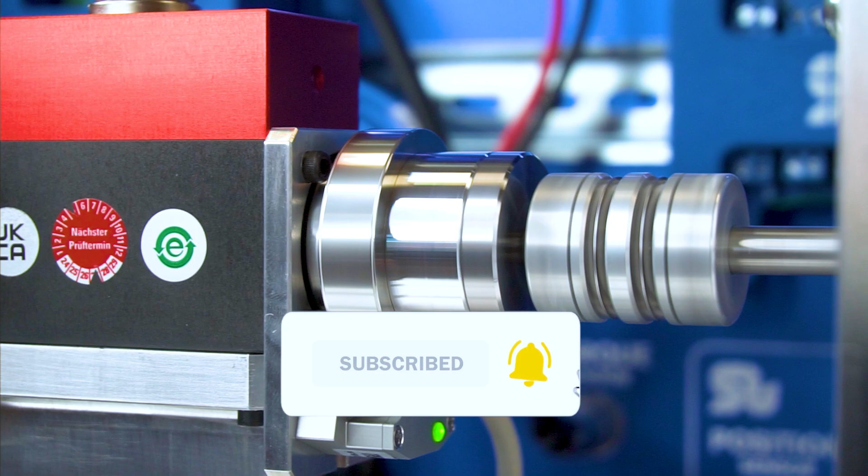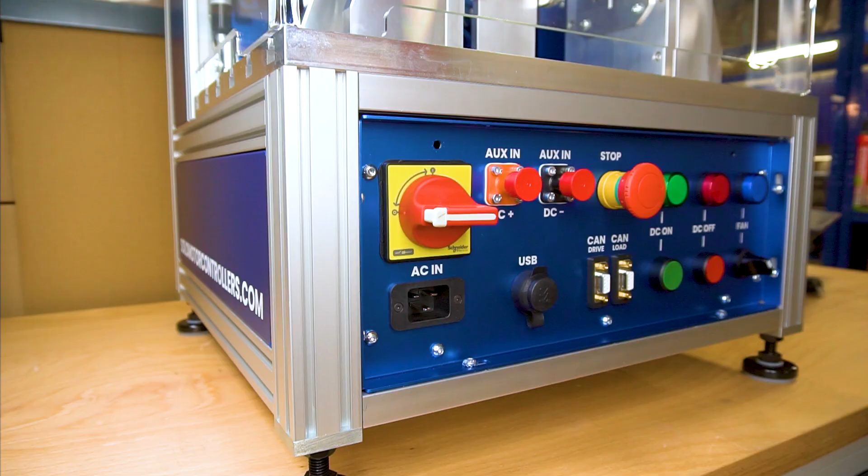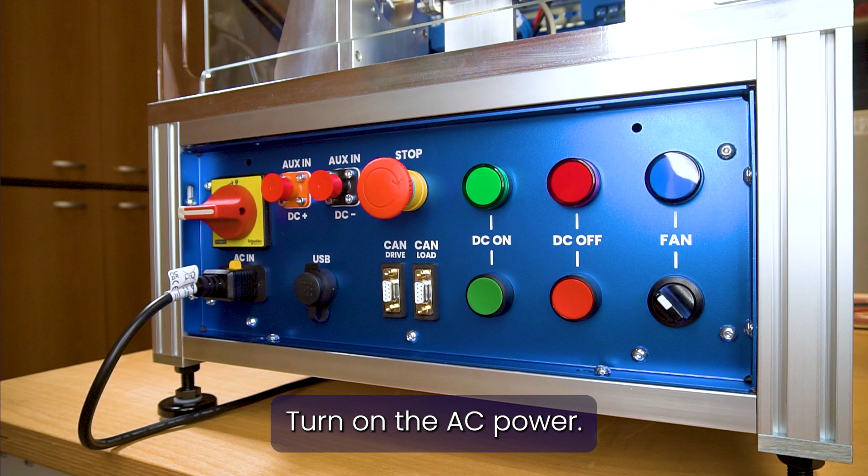In this video, you will learn how to operate the motor test bench and measure critical parameters such as speed, current, and torque. Plug in the AC power cord. Turn on the AC power. Open the protective cover.

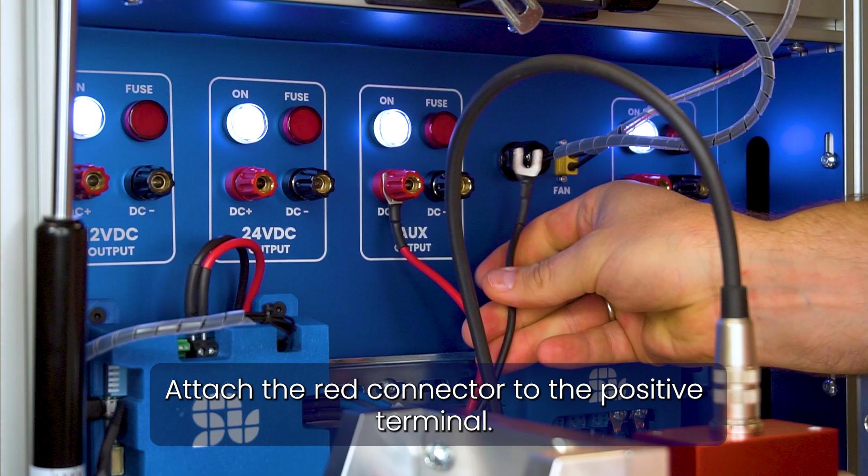Connect the DC power cables, ensuring the polarity is correct. Attach the red connector to the positive terminal. Attach the black connector to the negative terminal. To connect the external power supply, use the auxiliary inputs.

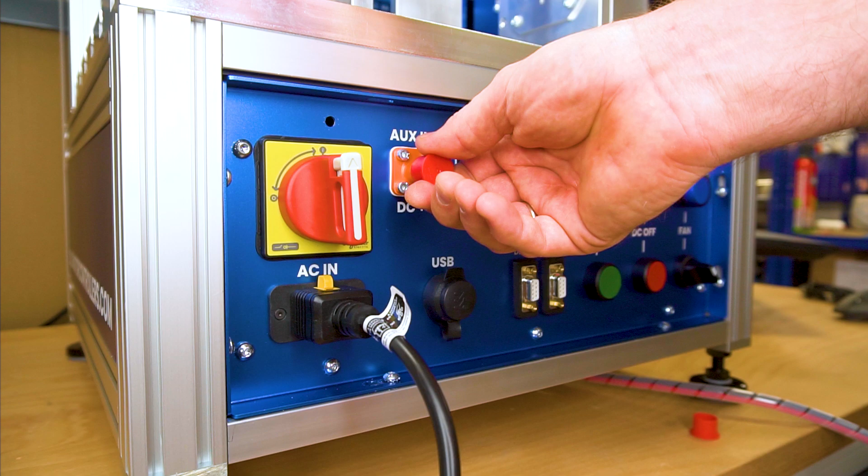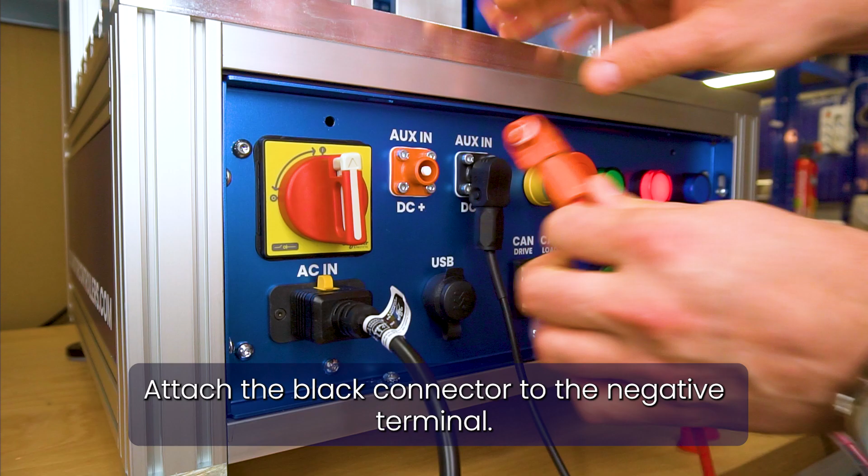Connect the DC power cables, ensuring the polarity is correct. Attach the black connector to the negative terminal. Attach the red connector to the positive voltage terminal. Ensure the shafts spin freely.

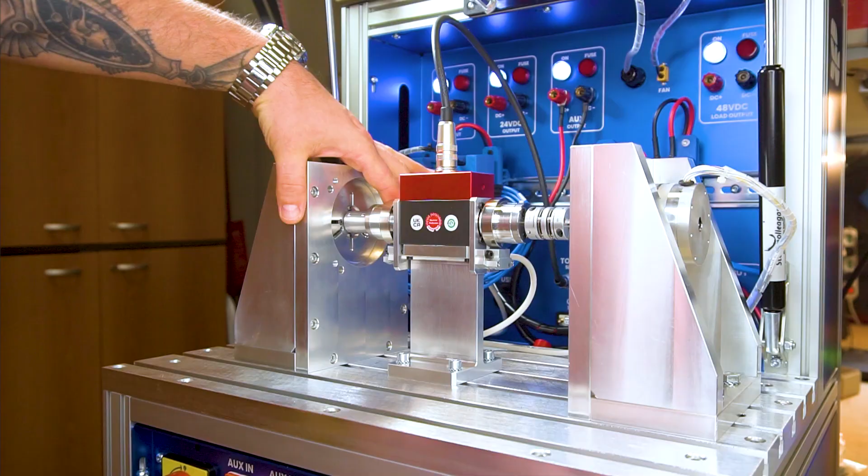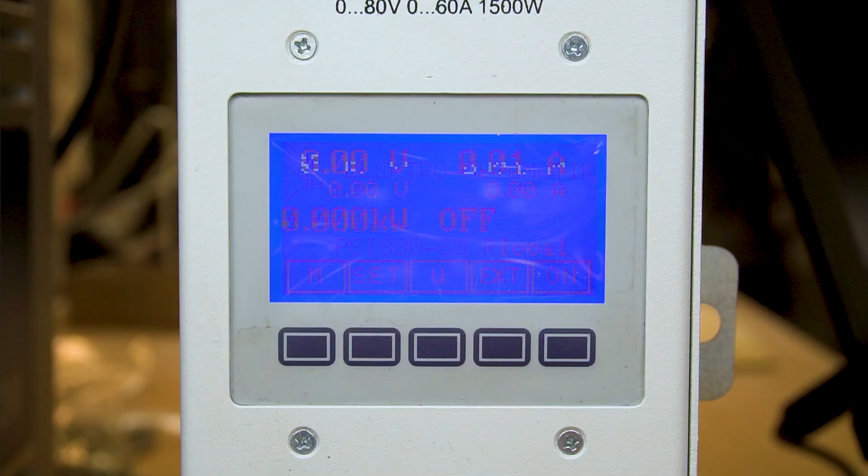Check that no foreign objects are inside the chamber. Close the covers securely before proceeding. Turn on the power supply. Verify that the bus voltage and current limit are correctly set according to the specifications of the motor being used.

Now, connect the USB cable to the data panel. Connect the USB cable to the PC. Turn on the main DC power. One of the key features of this test bench is Safe Torque Off. This safety feature stops the motors if the protective cover is opened or the red stop button is pressed.

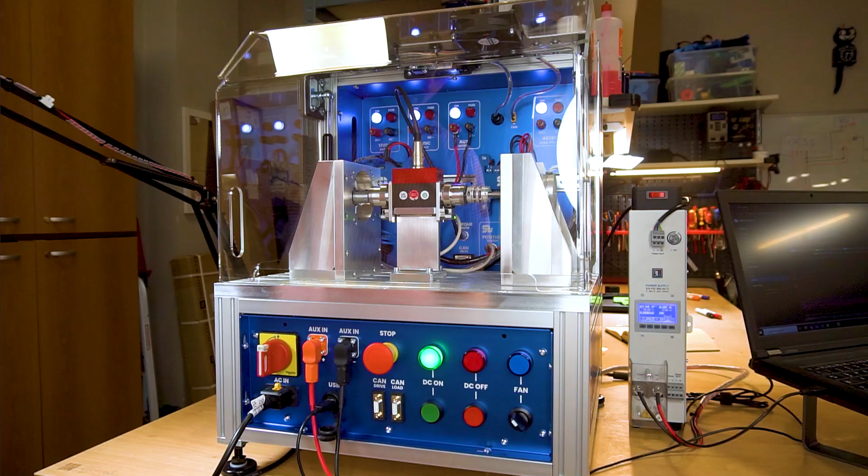This button shuts down the main DC power and turns off both controllers. The main DC power button remains inactive until we release the emergency stop button. You can turn on the fan if required. Open the motion terminal. Connect both controllers one by one. Left window is for the drive side, and right window is for the load side.

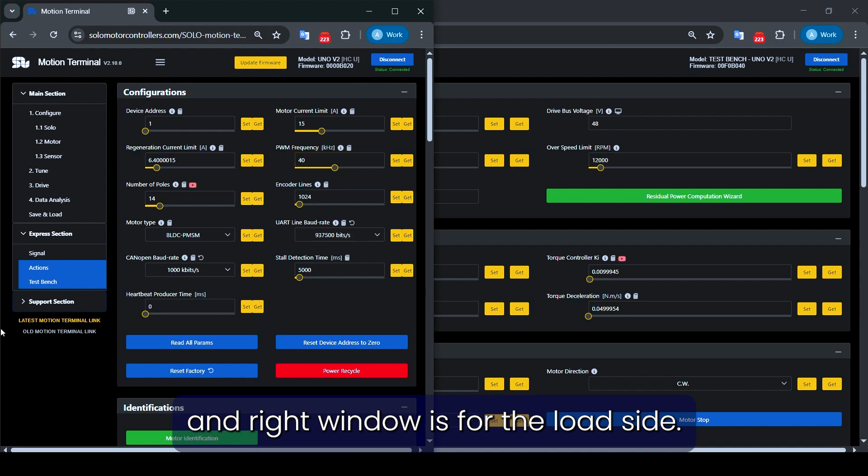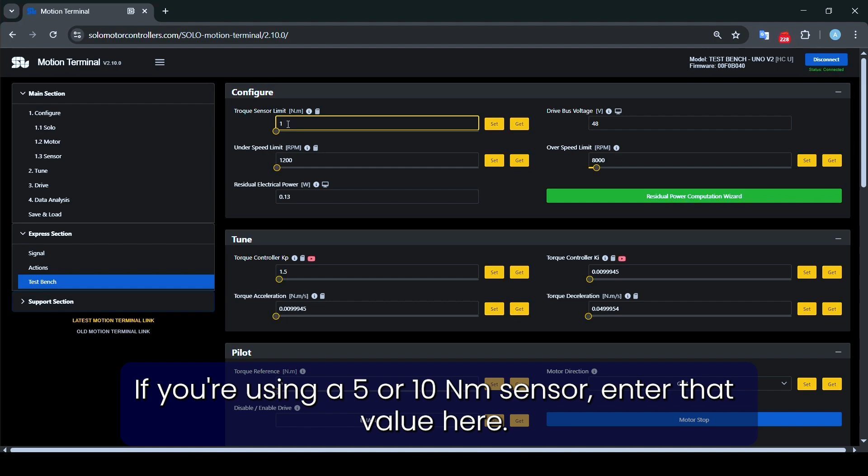Set the drive side to digital speed mode. So we start with the configuration field, where we set the torque sensor limit. For now, we use the 1 Newton-meter torque sensor. If you're using a 5 or 10 Newton-meter sensor, enter that value here. Then, the drive bus voltage for us now is 48 volts. If you use a different value, enter it here, as it affects the computed electrical power.

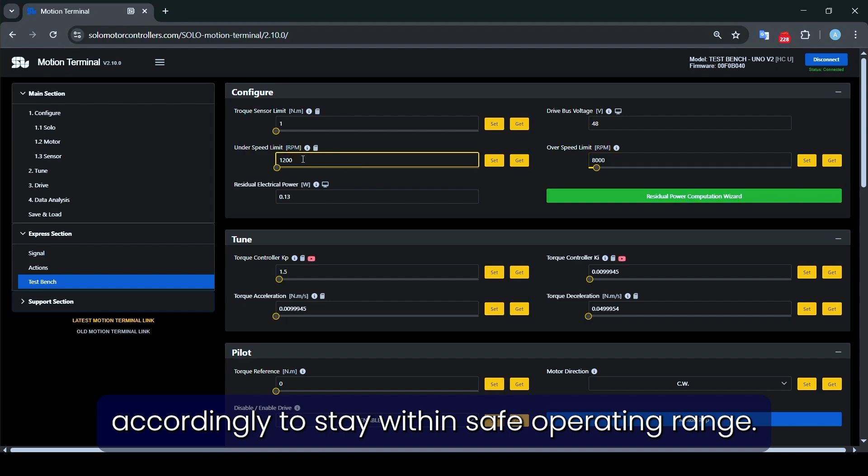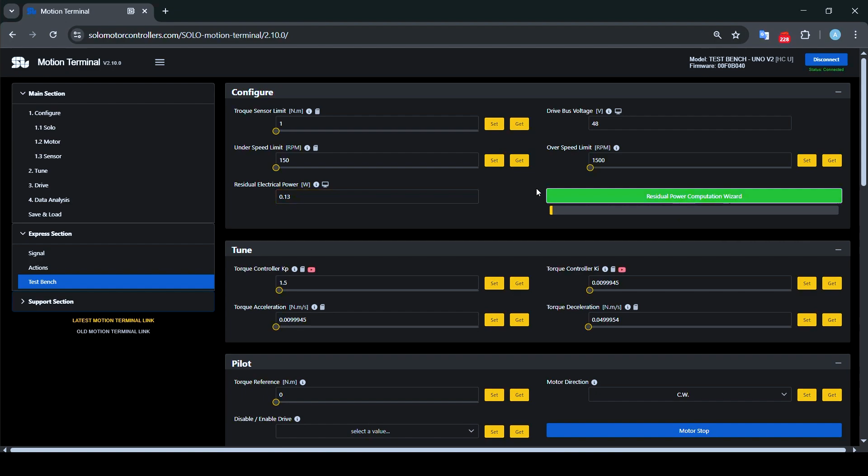So, the underspeed and overspeed limits must be adjusted accordingly to stay within safe operating range. Underspeed should be at least 15% of the speed reference, and overspeed should be 30 to 50% higher than the reference speed. To compute the residual electrical power, simply press this button. The result shown is the residual power value for the system.

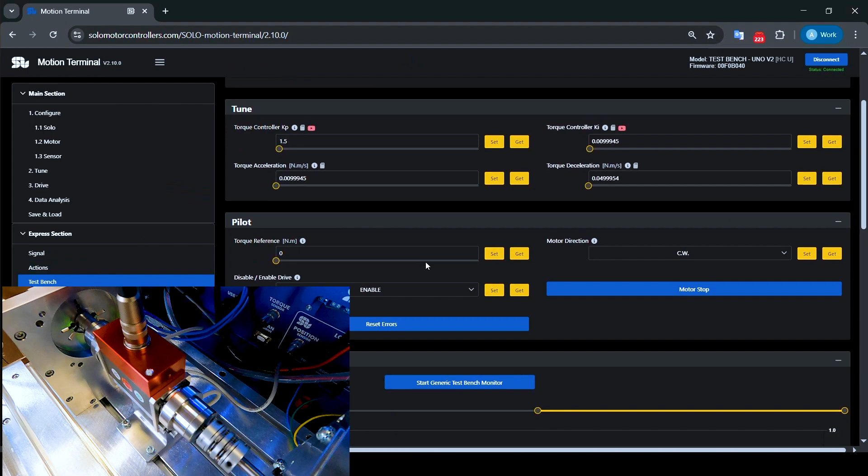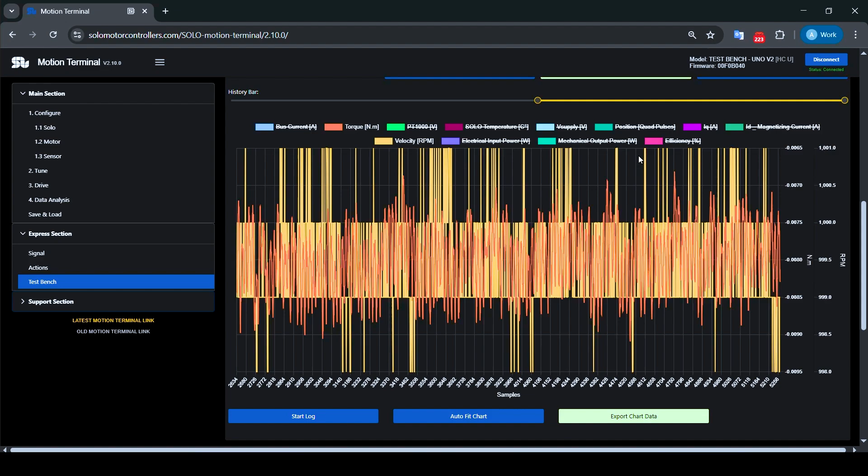Now, we move to the drive side and set the speed reference to 1000 RPM. Start the generic monitor. Keep torque and velocity active and observe motor performance. Set the torque reference to 0.09 and observe the graph.

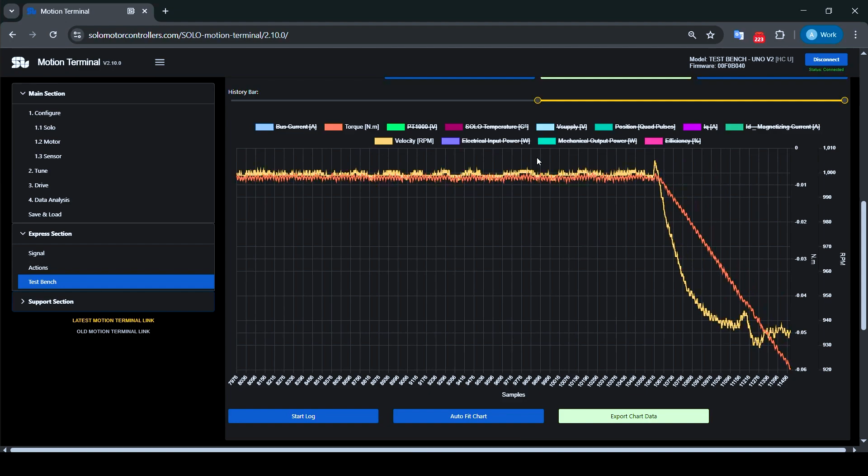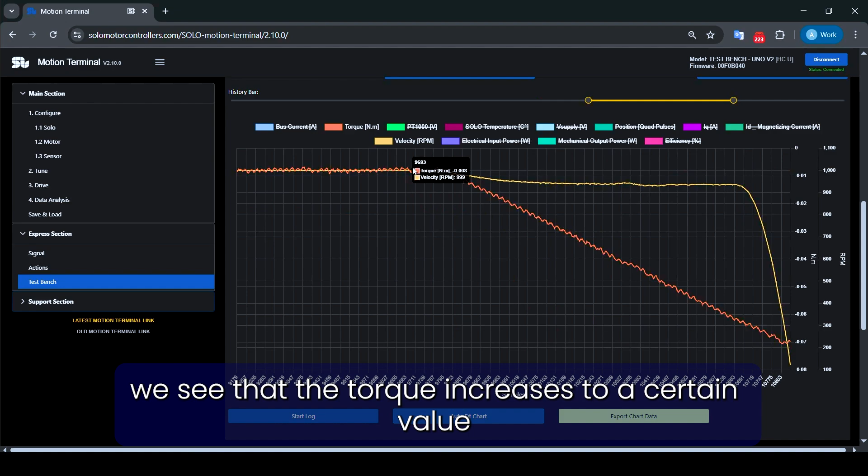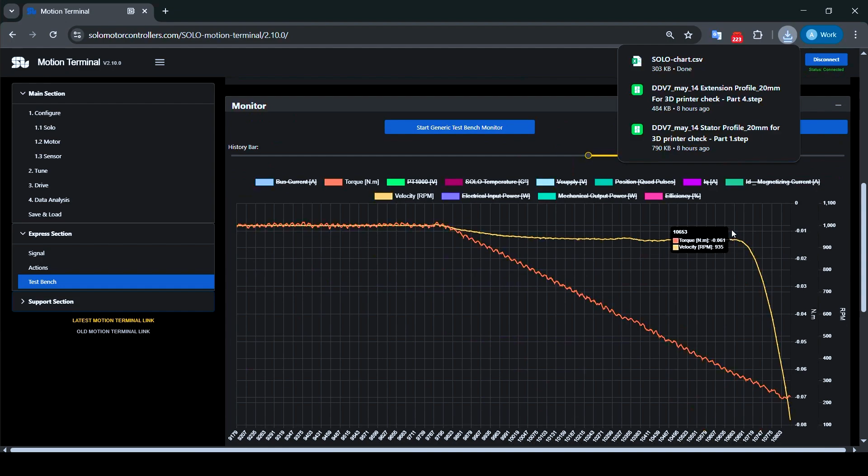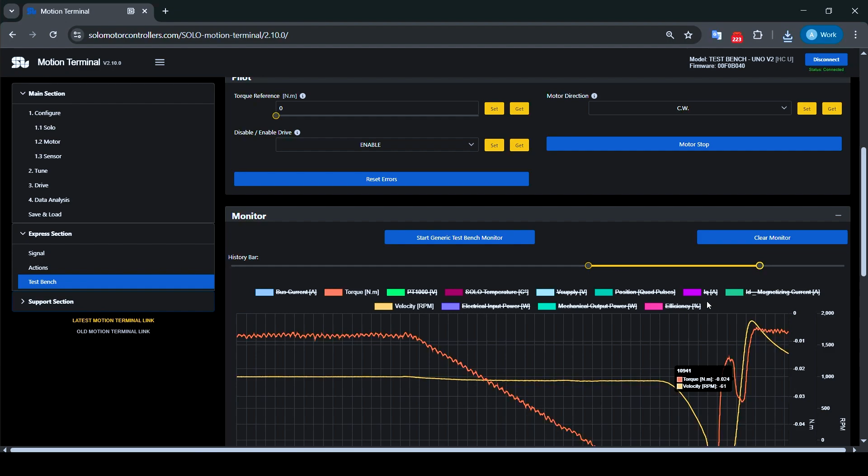If we stop the monitor and click Auto Fit Chart, we see that the torque increases to a certain value and then the speed drops. Click Auto Fit Chart again and export the data. The error notification is because the motor jumped over the limit. So, every time before changing the limit, reset the errors. The same procedure was followed for 2,000, 3,000, 4,000, and 5,000 RPM as well.

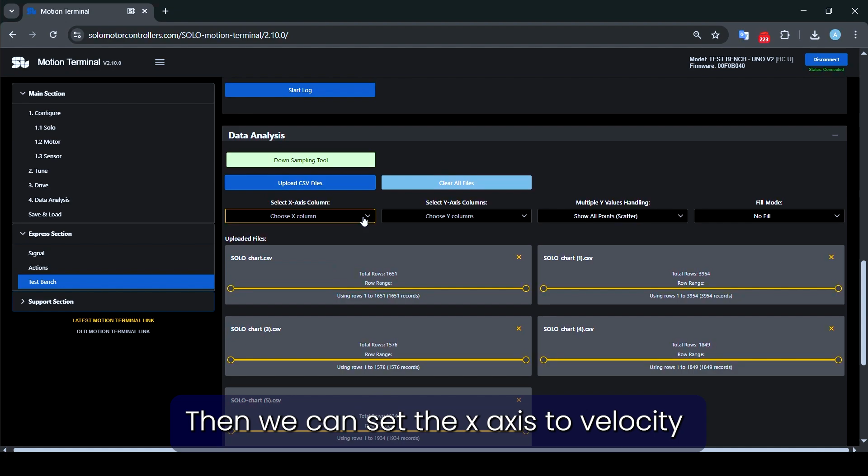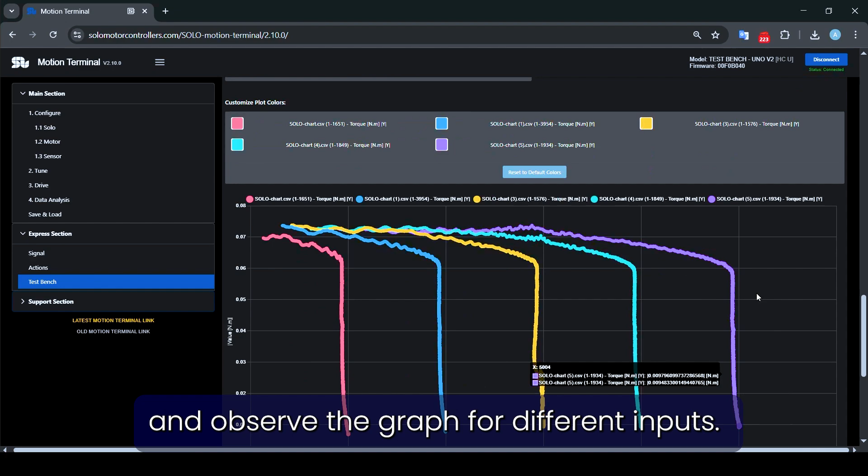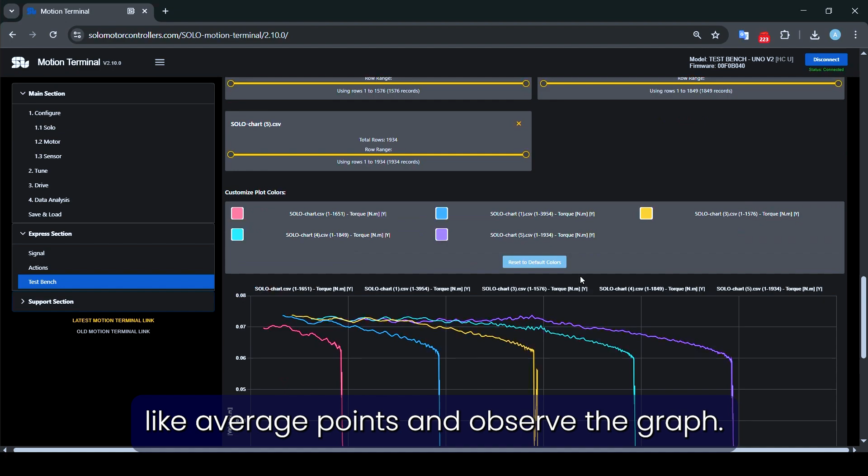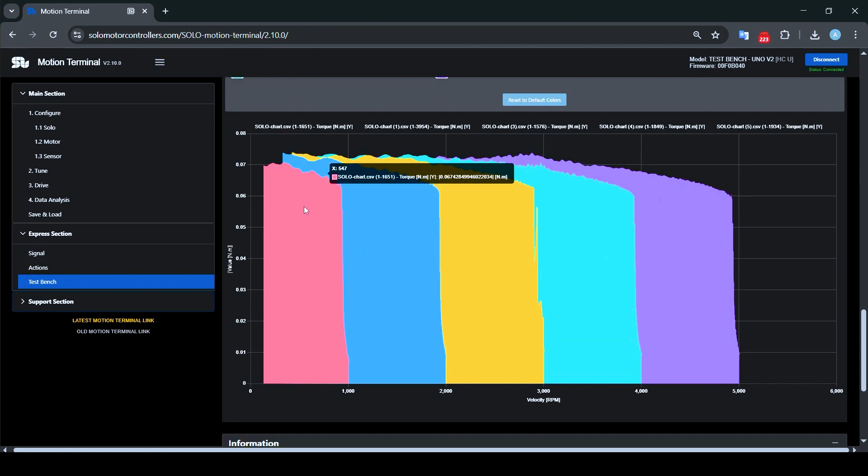To analyze the data, we can upload the files and observe the graph. Then, we can set the x-axis to velocity and the y-axis to torque. This will generate the graph for all the data. Select Use Absolute Values and observe the graph for different inputs. We can use some tools like average points and observe the graph. We can also fill them. You can export the chart image in this format, which is suitable for use in reports.

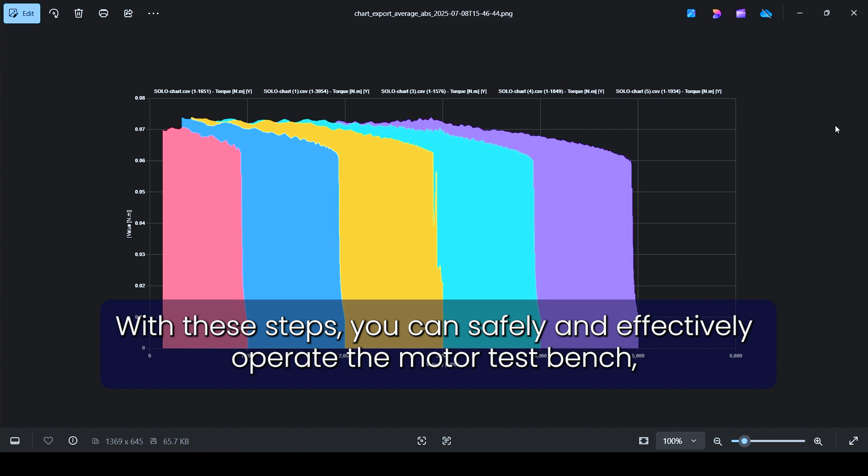With these steps, you can safely and effectively operate the motor test bench, perform measurements, and test motor performance under various conditions.